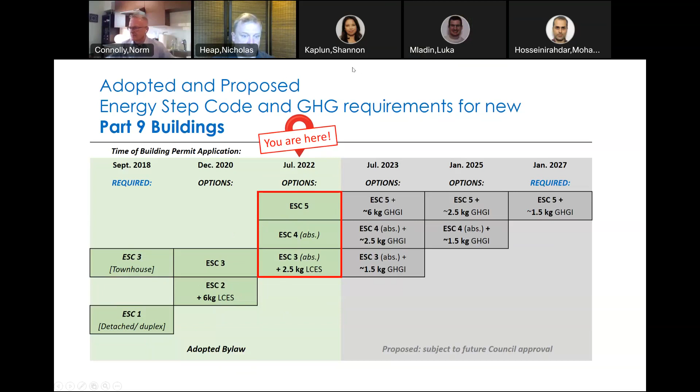So right now, I've described these as the three minimum options. Norm and I have a discussion about whether that's the correct vocabulary or not, but understand that at the moment, if you would like to build to step 3, this is the minimum you can do. If you want to build to step 4, this is the minimum you can do. If you want to build to step 5, these are the minimum options you have available. Strictly speaking, step 5 is our basic requirement. And at step 5, you have a choice of building to a TEDI metric. The numbers I've posted are not the ones in the BC Building Code, but rather the heating degree adjusted TEDI values for Richmond, because they are somewhat lower than the absolute TEDI numbers shown in the BC Building Code. So as a service to yourselves, this is what the heating degree adjusted TEDI is for Richmond.

But at step 5, you also have the option of using the percent better than reference house option. So at step 5, that's 50% better than the reference house as a way of complying with the building envelope requirement. Then we have our mechanical efficiency requirement, the MEUI. As you can see there, it's 25 kilowatt hours per square meter per year of conditioned space, or slightly higher if air conditioned space is more than 50% of your conditioned area. And then we have our air tightness target of 1 air change per hour. So that's at step 5.

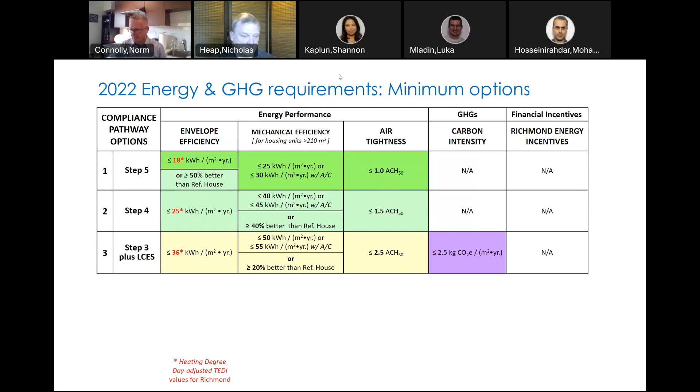Sorry. So just to make life more interesting, the province is updating the BC Building Code at the end of this year. What I've shown here is I've mapped in the changes that have been proposed by provincial staff for incorporation into the BC Building Code, and that involves some adjustments to the energy step code. So you'll see that at step 5, the percent better than reference house goes down to 40 from 50%. They've introduced a percent better than reference house for the mechanical efficiency requirement, but the province has stipulated in their draft recommendations that if you do the percent better than reference house, then you need to do both envelope efficiency and mechanical efficiency. It's certainly the case that if you choose the envelope efficiency percent better than reference house route, then you need to also do that for the mechanical efficiency, as I understand it.

Another big change is air tightness. They're including 2 other metrics, 2 other ways of developing an air tightness score that are equivalent to the air changes per hour metric. These alternative metrics produce better results when it comes to small homes, and I believe that there's a metric that works best for larger buildings as well. So the province is adopting this on the recommendation of building experts who think this will be more equitable.

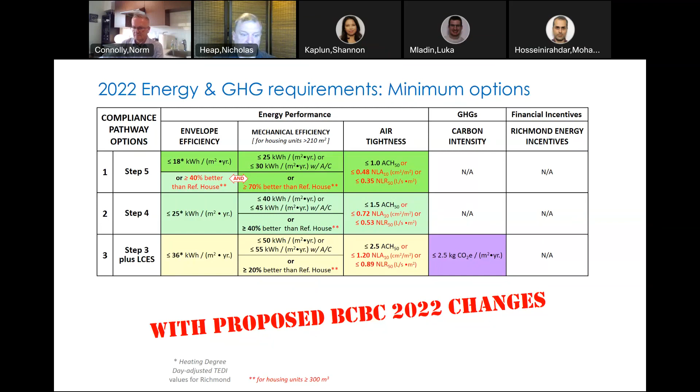So let's just take a little bit of a closer look at step 5. So again, we've got 3 options when it comes to the building envelope efficiency. We have the absolute TEDI, we have the heating degree adjusted TEDI, which is the one that we're showing on this chart. And then at step 5, you also have the option of building to percent better than reference house. For mechanical efficiency, there is at the moment no reference house target that can be hit in step code at level 5. So what you have there are the MEUI targets for conditioned space and for homes with air conditioning.

And then we have the air tightness target of 1 ACH. So there's no greenhouse gas requirements, and you can use a percent better than reference house at step 5. Next, Norm. Step 4, you do not have the option of using percent better than reference house for building envelope efficiency, although there is a percent better than reference house option when it comes to mechanical systems efficiency. So instead of doing a MEUI, you can do percent better than reference house for mechanical efficiency.

Air tightness is 1.5 air changes per hour. Again, there are no greenhouse gas requirements at step 4. At step 3, next slide, Norm. Yes. Again, you can't use the percent better than reference house option. You have a choice of options when it comes to mechanical efficiency. You can either use MEUI or the percent better than reference house option. Air tightness is 2.5 air changes per hour.

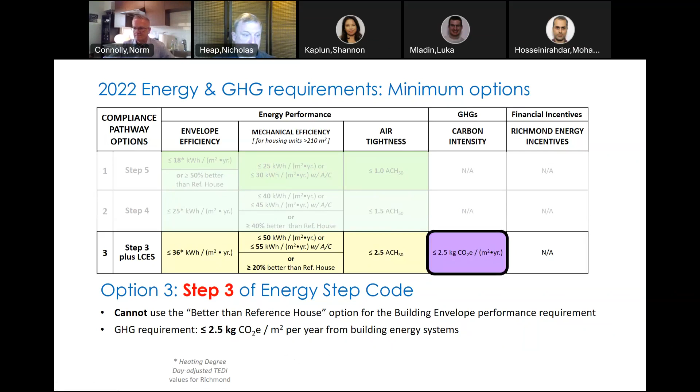Right, let's talk a little bit more about that 2.5 kilograms target, because that itself is shorthand. This set of greenhouse gas targets is taken directly from what the province is currently proposing, but you'll see it has 3 components. There's a minimum allowance that's designed with small houses in mind, because it is difficult for small homes to meet a pure intensity target. So there is a minimum allowance that covers small housing units. There is an intensity target which scales as the conditioned floor space of the housing unit increases, and then there is a maximum cap.

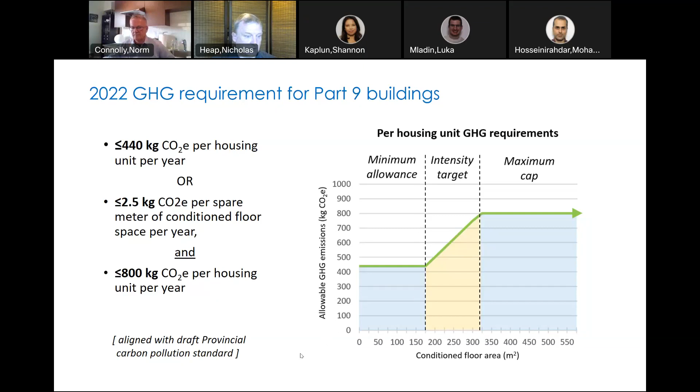So, once you get above about 320 square meters, I believe it is, for a single housing unit, the greenhouse gas target does not go up, because it is in reflection of the fact that it is easier for larger homes to meet a given greenhouse gas target. So those are the numbers put forward by the province. This is completely in line with what the province is proposing for introduction at the end of the year. So hopefully that's clear. Next slide, Norm.

It's important to say that this pertains to a housing unit. But a housing unit, as the province means it, does not apply to a secondary suite. So if we have a detached house, that is going to be 1 unit, and the greenhouse gas requirements would treat the detached house as 1 unit, even if a secondary suite was in it. If you have a duplex, then you have 2 housing units, and so this is the greenhouse gas requirement for each unit, and so the total for the building would be ×2.

If you had a 4-unit townhouse building, you would have this greenhouse gas requirement ×4 within the building as a whole. But again, if there are secondary suites in some of these townhouse units, that doesn't give you more than 4 units. It's the principal units that are being counted when it comes to this greenhouse gas requirement. And again, this is in lockstep with what the province's definitions are.

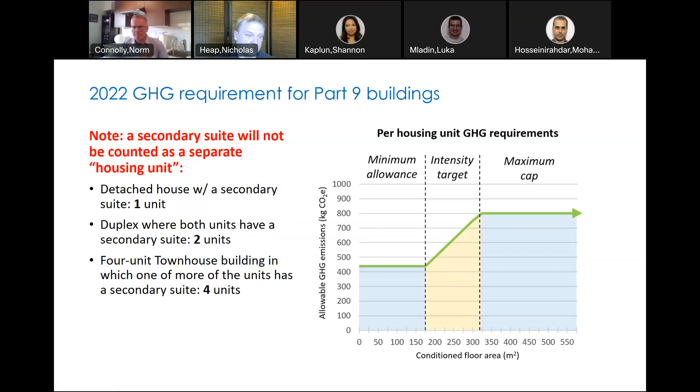So let's talk about in-stream provisions. Next slide. This is consistent with what we have done before when energy step code requirements have been increased. So if your development was subject to a development permit, and that permit was issued prior to July 1st, 2022, then you can build to the previous energy step code requirements that were in effect as of December 2020.

If you have a development permit application that was accepted before July 1st, 2022, and it is still in process, then in order to build to the previous requirements, you need to get a recommendation of approval from the development permit panel prior to July 1st, 2023. And in addition to that, you'll need to submit a complete building permit application, by which we mean all plans showing all the building details, prior to July 1st, 2023.

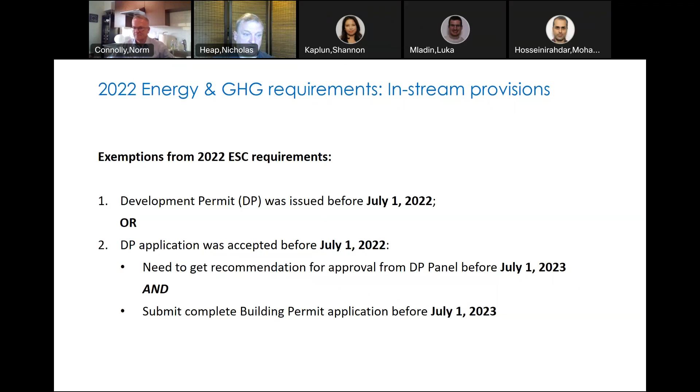So under those conditions, you can still build to the requirements that were put into place as of December 2020. If you don't meet those requirements, then the July 2022 Energy Step Code requirements apply to your development. Next slide. So now let's look at design responses to the Energy Step Code requirements. This is just a quick overview. If folks are interested, this is something that we can devote a future virtual builder breakfast to.

There was a recognition by staff that as we start going towards the highest levels of the Energy Step Code, it's not simply a matter of putting in more mechanicals or more insulation on the walls. The design of the home or building becomes an important factor in the overall efficiency.

As a summary of the design responses the city is expecting to see as we move forward with the Energy Step Code, here's a summary of the kinds of things we're expecting to see. This is of particular relevance to our form and character guidelines. If you're going through a development permit process, the city has a range of development form and character guidelines that developments are expected to meet.

This is what we expect to happen as folks are meeting both high performance energy requirements and the city's existing form and character guidelines. We would expect to see more compact massing of buildings that reduce the size of the thermal envelope relative to the volume of the building. We'd expect somewhat simpler building and roof forms that enhance thermal performance for the same reason—reducing surface area relative to volume. And we'll expect fewer complex junctions where you've got changes in plane in three directions at once.

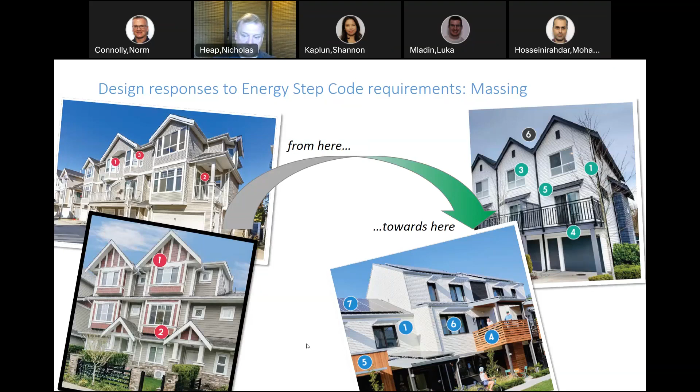Summarizing what I've said so far: we've got some buildings on the left that have been built in Richmond in the past, and these are totally code compliant. But as we move towards higher energy performance requirements, we expect a shift towards simpler volumes with less complex junctions, as I mentioned before. So we expect to see designs coming forward that look a bit more like these pictures on the right.

When it comes to balconies, they're very important in Richmond, especially in Part 3 buildings but also in townhouses. Balconies can be a major source of heat loss because the structure tends to penetrate through the building envelope, making them a major route for heat loss if you're using conventional balcony techniques. Luckily, there are a number of approaches to building balconies that reduce heat loss at the connection points, and I've got another picture to show some of those approaches.

So I've got these four diagrams below here. This is certainly a Part 3 building, although the same principle does apply to a lesser extent for Part 9 buildings. You've got a lot of thermal bridging through a conventional balcony construction, as we commonly do it here in Richmond at the moment.

But there are ways of significantly reducing that through the use of self-supported balconies, where you've got external supports for the balcony and a tie-in back to the building that can have an insulated block reducing heat transfer through the building envelope.

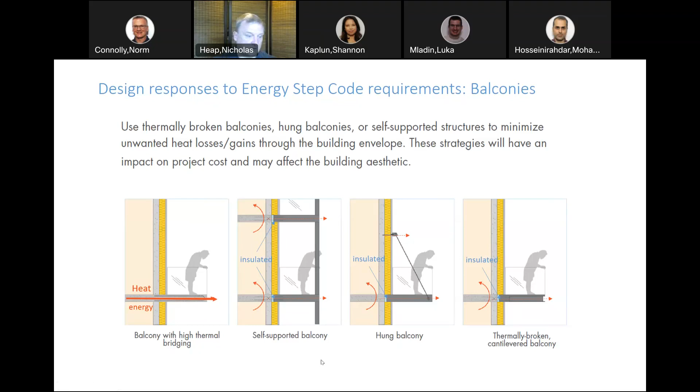We do expect to see more of this going forward as folks are building to higher energy efficiency requirements. Next, Norm.

Finally, what we expect to see is a bit of a shift away from building articulation, which is to say taking a single building and disaggregating it into its various components as a way of making the building more legible, and as a way of providing delight and visual interest. The most straightforward way of articulating a building is to change the shape of the building, to create physical little details in the shape.

But there are many, many ways of articulating a building that can involve things like texture, colors, different materials, patterning. All of these things serve to set out one part of the building relative to another, and these are all ways of achieving the building articulation that provides the visual interest and delight that we like in buildings.

Norm, next slide. Got some pictures here. So what we have in these pictures are pretty volumetrically simple buildings, but they are highly articulated.

It's very easy to distinguish one housing unit from the next, and this is sort of in a townhouse frame of reference. But what we're seeing here is a lot of use of color, of different building materials that distinguish one part of the building from the other, and some use of different textures even that result from the different materials.

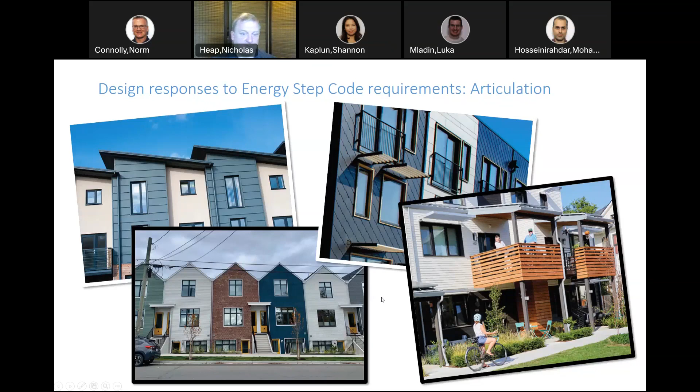That is a real quick overview of the kinds of changes that we expect to see. And here it is with stuff not grayed out. Next slide as well - when we provide the slide deck, I'll give you those two so they're easy to manage. If folks are interested in spending more time on design options, we'd be happy to do that at a future virtual builders breakfast.

But that's sort of a high level overview, and it's just to let you know that we're expecting to see a shift in the designs that proponents are coming up with as they're bringing new projects forward, as an effective response to these new higher performance requirements for energy efficiency that also keep the city's form and character guidelines in mind.

Nick, we have another question or a hand up. Okay. David Eaton would like to ask a question. David, if you want to unmute, you can ask your question. I'm not hearing David. Are you on mute, David? Sometimes it takes a second here. Okay. Maybe sometimes people put their hands up by accident. Oh, here we go. He's here. Hi, David. I think it's the lovely WebEx controls. Yes, sometimes there's a bit of a delay.

So I think we had a question from Vikas, Vikas Mesa, saying, are we thinking to stop having box windows to achieve energy efficiency? And I think the answer to that is, again, the energy step code is a performance code. So you can have as many box windows as you wish to have, so long as you meet the performance requirements of the energy step code.

What we're saying here is that in general, box windows can be a source of more energy leakage through the building envelope than other parts of the building because they have a lot of complex corners. And so it is more difficult to achieve a high level of energy performance with features like box windows. As Norm points out, the use of external insulation is one quite effective way of dealing with that.

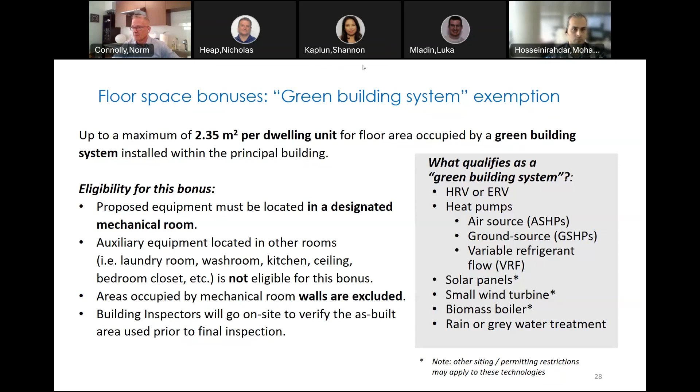And so for servicing this equipment, it's really beneficial to have something in a centralized location, and it's accessible both to the owner and to anybody servicing it. So, thanks, Norm.

So here are two examples that show how you can be eligible for additional FAR when using the green system. On the left side, there is a designated mechanical room for HRV, and the HRV has been located in there. I should emphasize that this is a designated mechanical room. It means that if you want, for example, to add your AC unit to this space, you are allowed to do that, and you are still eligible for this FAR bonus.

So be noted that you would be eligible for up to 2.35 square meters. It means that if this space is more than 2.35 square meters, for example, it is 3 square meters, you only get 2.35 square meters. Or if it is 2 square meters, you only get 2 square meters. So be careful about the up to 2.35 square meters terms.

On the right-hand side, you see that the HRV has been located in the laundry room. So this is not eligible for this additional FAR, but you are allowed to put the HRV in that space. There's no issue with that, but you are not eligible for FAR in that case. Please go to the next slide.

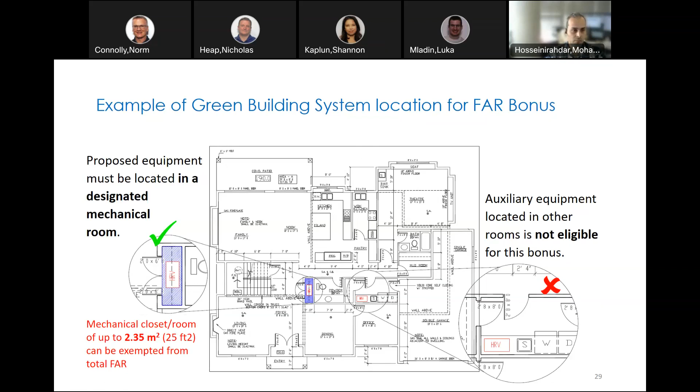Well, the additional extra floor area bonus is for those applications that have to use a thicker wall than a regular 2x6 stud wall in order to meet the envelope efficiency requirement due to the new energy step code requirement after July 1st. So as you know, for a step 4, the adjusted TEDI requirement is now tighter than before, and even a step 3 application needs to comply with adjusted TEDI for step 3, and percentage better than reference house is not allowed anymore.

So depending on the archetype, many applications need to use a thicker wall in that case. So in order to compensate the floor area occupied by the thicker wall, we give an extra floor area bonus. For a 2x6 stud wall plus 2 inches of exterior insulation, there would be 2% extra FAR on top of the FAR.

And also for a 2x8 stud wall, again, there would be 2% of the FAR added to the primary FAR, and for a 2x10 stud wall, 4% of the FAR can be added to the floor area. And we came up with these numbers by doing several measurements on different archetypes, and the average floor area occupied by a thicker wall came up with these numbers.

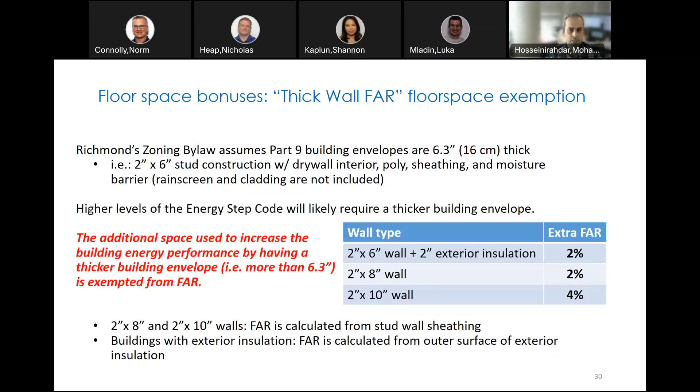You can visualize this. Here's an example of a 2x6 stud wall plus 2 inches of exterior insulation. So first of all, floor area is measured from the exterior surface of the exterior insulation. So in this case, the FAR is calculated from the exterior insulation, and it comes up with 146.5 square meters. So 2% of this value would be 2.93 square meters, and this can be added to the floor area for this application.

So this should be repeated for the second floor for a complete application. Here is just an example of the ground floor. For a complete application, this should be repeated for the second floor as well. And that extra floor area can be added to the total FAR.

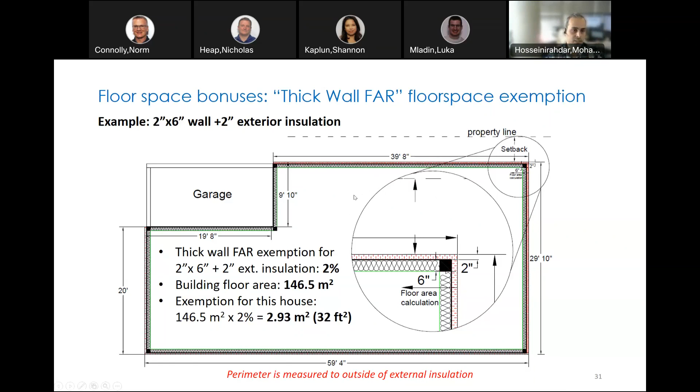In the next slide, here is an example of the 2x8 wall. So as I said, the measurement here is taken from the exterior wall sheathing. And in this example, based on the exterior dimension, the floor area came up with 143.7 square meters. 2% of this FAR would be 2.87 square meters, and this would be added to the floor area as a bonus.

So as you see, you have to use a thicker wall for increasing your level of building envelope and insulation. That means that some part of your floor area is occupied by the thicker wall, but we give this bonus and compensation so you don't lose floor area when you use a better level of wall insulation.

And just to add, these dimensions and calculations that Mohammed's showing in these details were just an example to show how we arrived at the 2%. You will not have to do these calculations yourself. If you have a 2x8 wall or a 2x6 wall with 2 inches of exterior insulation, you just take the allowable density for the lot that you have, and you add 2% to that, and that's how much square footage you can build on the property.

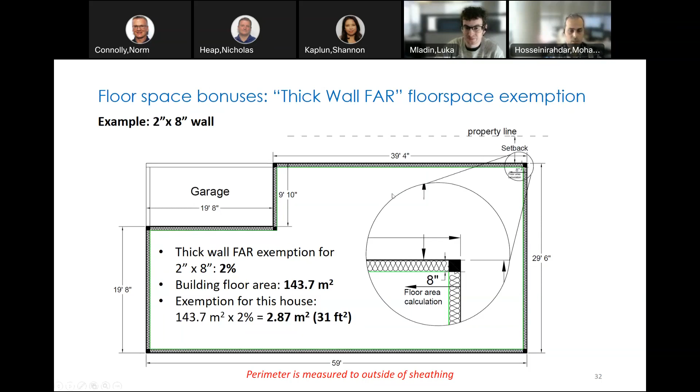So yes, next slide. So there are other FAR bonuses for applications that would like to apply for Step 5 and passive house. For a Step 5 application that meets the requirements for energy efficiency, mechanical energy efficiency, envelope efficiency, and airtightness score, as noted in this table, there would be a 5% additional FAR bonus for these houses, 100% of the building permit fee would be rebated, and also 5 square meters of floor area would be given for using a green system for a Step 5 application.

I need to emphasize that Step 5 applications that apply for incentives need to comply with the adjusted TEDI as mentioned here, 18 kilowatt hours per square meter per year. And you're not able to use percentage better for envelope efficiency if you want to apply for Step 5 incentives.

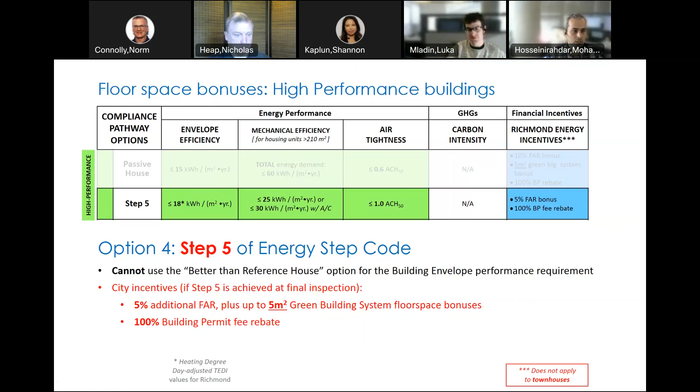Next slide, please. No. Sorry, I've grayed out the wrong part there. My apologies. Can we just speak to it anyways? Yeah, let's speak to it anyway. So I've made it hard for folks to see it, because I just screwed up there.

But if you choose to build a passive house, passive house is an international standard. These requirements are not created by the provincial government, certainly not by us: an envelope efficiency of 15 kilowatt hours per square meter of conditioned floor space per year, a total energy demand for the building of less than 60 kilowatt hours per square meter of conditioned floor space per year, and an airtightness of 0.6 air changes per hour. That is the passive house standard.

If you build successfully to this standard, that is a 10% floor area ratio bonus. The green building system bonus increases from 2.35 meters to 5 meters. And again, there is a 100% rebate on the building permit fees.

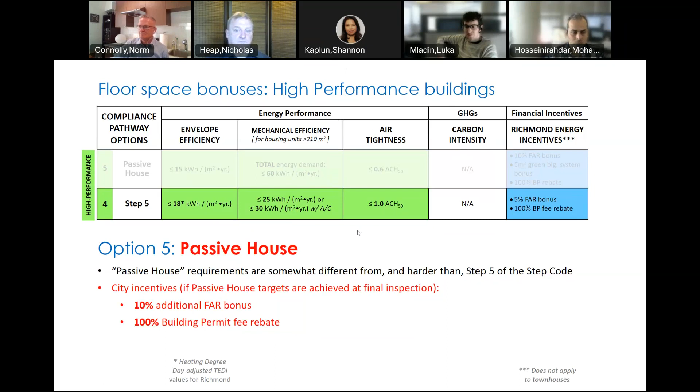And in those cases, the city is providing additional high performance energy incentives. But the other bonuses that we were just discussing, the green energy system and the thick wall exclusion, apply to all houses at any of the levels that we're looking at here. So if you have a Step 3 house with a thick wall, then you can get the thick wall exclusion. If you have a Step 3 house with a mechanical room or green building energy systems, again, you can take advantage of that FAR exemption as well.

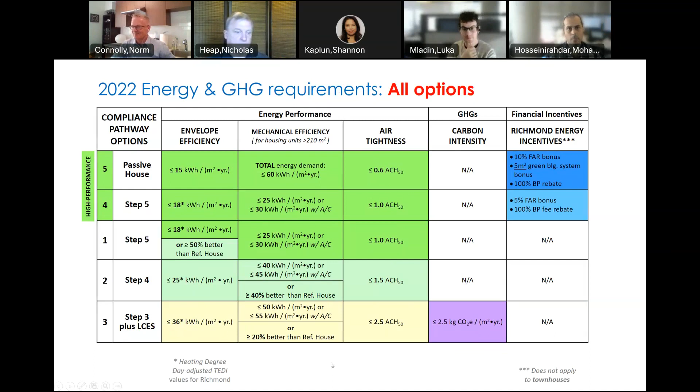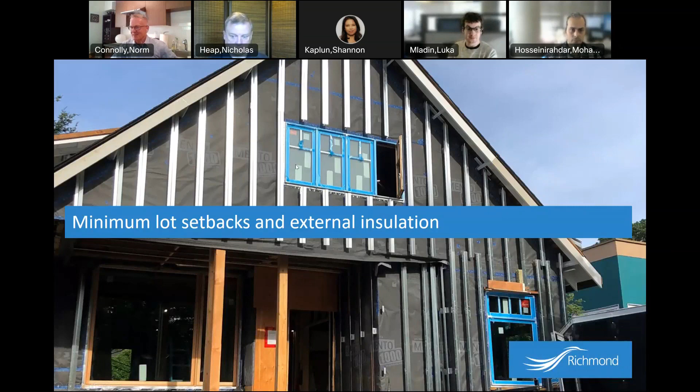And a topic of conversation already in terms of that, and a deep dive into this a little further.

Luka, were you covering this? I don't think I was, but I can.

Okay. That's fine. So yeah, for buildings with exterior insulation, we're going to be measuring your setbacks from the property line to the outside of those exterior insulations. For buildings with external insulation, the distance from the property line to the building foundation will be larger than the minimum required setback. So there'll be a difference between where your insulation is, that's your setback, but then your foundation will be set a little bit further in. So those shifting of the foundations by, let's say, 2 inches, if you had a 2-inch exterior insulation, you have to adjust that for your building and for your square footage calculations.

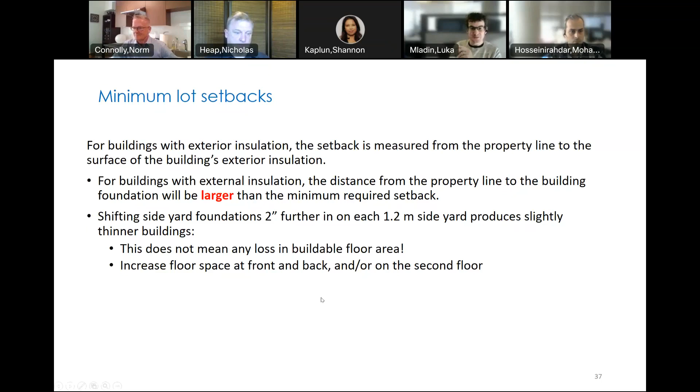Next slide, please. Yeah, so as part of your application, you're going to include a site plan, which you already do as a designer, but you just have to be aware that when you're drawing your site plan and your footprint of your home, you're drawing to the outside of your exterior insulation. The only additional thing we'll ask for is for you to provide a foundation plan with the lot line shown with the adjusted setbacks for the foundation itself.

This is important for forms inspections so that inspectors on site know exactly where your forms need to be, and that we can also, as plan reviewers, check it against your structural drawings so that those dimensions on the structural foundation plans match your architectural drawings of the foundation plan. Next slide, please.

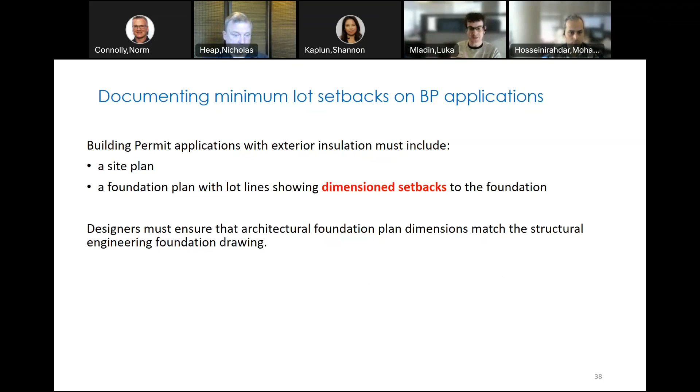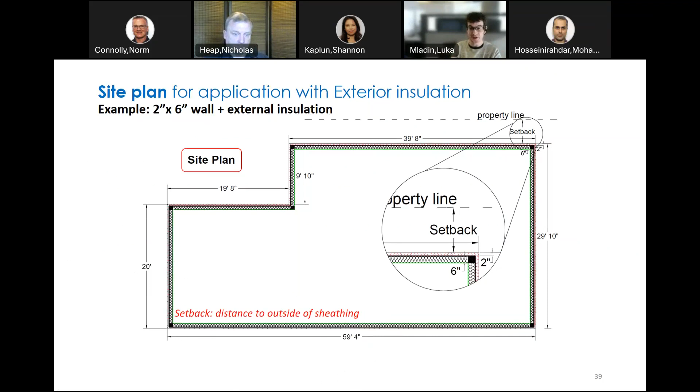And then also, we're hoping that this will help you coordinate with your structural engineers to make sure that all of your dimensions on this plan match their dimensions on their foundation plans. But again, just to clarify, this additional foundation plan will only be asked for when using external insulation. If you're using a 2x8 wall or a 2x10 wall, we will not ask for this additional drawing. And that's it for me.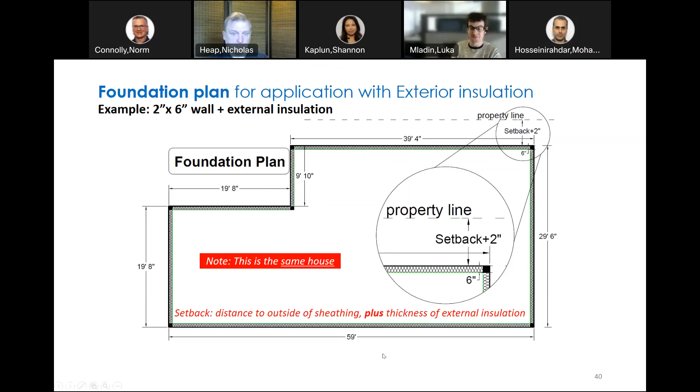Thanks, Luka and Mohammed, on that deep dive. Any further questions on this? There are some questions. I think we've already covered the requirements and regulations of installing a heat pump, have we not? No side yard? Yeah, that one we did, yes. Does CHBA net zero labeled homes get any incentives? Not from the city. Okay.

What efforts have been made in Richmond to be consistent with other municipalities? Go ahead, Nick. Yeah, I think the cities are in conversation with each other. Certainly, with the new BC 2022 coming into effect, which is going to require step 3 as a minimum, there's simply less options for municipalities to choose from. We're certainly seeing many municipalities go to step 5 as a default option, with step down options for folks that put in low carbon energy systems.

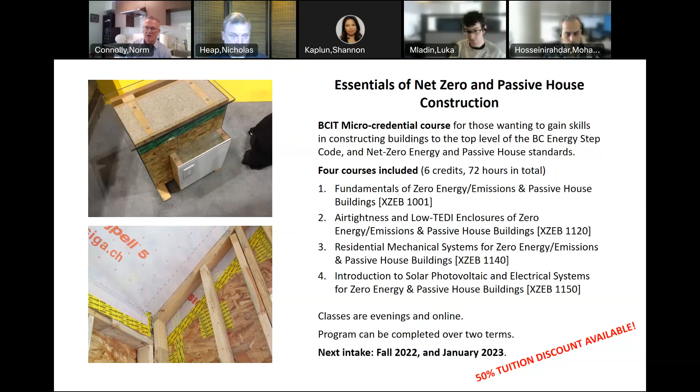Included with this, if you have a preference for hands-on and in-person instruction, you can get an additional 2 credits for a 24-hour in total course on air tightness and low TEDI enclosures. This is a hands-on lab in the high performance construction lab at BCIT. And if you enroll in this, you don't have to take the online equivalent course, but you get a lot more in-person, hands-on, in-lab time.

If that's something to think about, you can also look at this. This particular course is offered 3 times annually, both in the fall this year and into January, and of course the spring. Once again, a 50% tuition discount is available.

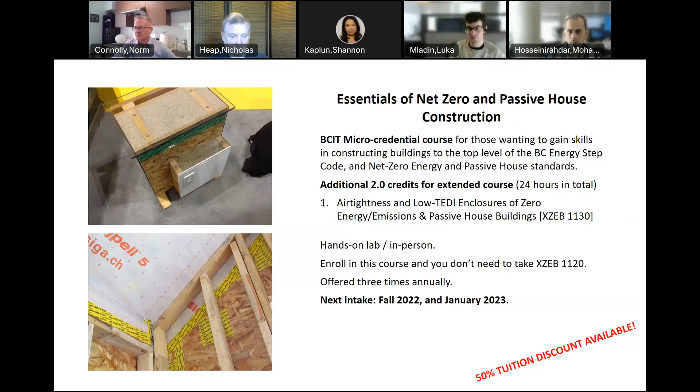We're also opening up the discount package for those that have a construction consultancy or operation where they're looking to improve or bolster their skills in supervising and administering on-site construction of high performance buildings at the net zero and passive house level.

This is once again a micro-credential course consisting of a number of components to be completed. So if you're coordinating or supervising smaller teams and sub-trades on Part 9 projects or even larger, more complex wood frame projects, this course might be for you.

It gets you into the details on on-site characteristics of managing compliance and achieving the performance requirements of STEP code and passive house standards, and also preparing for the upcoming changes to the National Building Code. So that program is offered as part of this package.

Just as a mention, BC Housing Builder Licensing, October 2022, has new requirements for energy step code training, and obviously references these courses as one of the ways to achieve it. BCIT's courses are equivalent to all 8 of the mandatory energy step code CPD training modules needed for builder licensing. So it's something to consider on that pathway to maintaining your CPD as a builder - taking these modules, especially the new ones, will qualify.

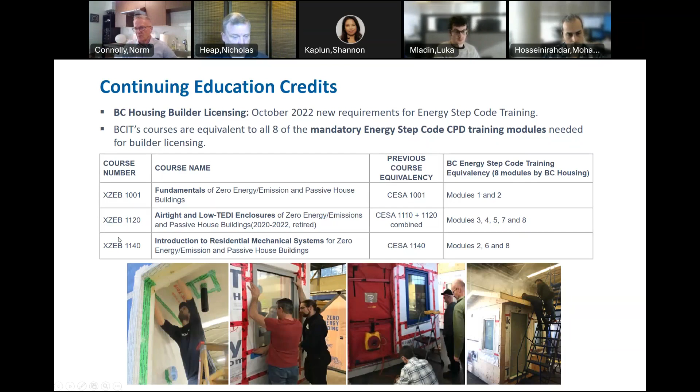So these ones - 1001, 1120, and 1140 - are the courses that are particular for the energy step code CPD training modules in terms of the equivalency. The columns here just reference last year's previous course equivalencies for comparison, but they've been reformatted and renumbered for this year and next year.

So how it works is basically the courses are online or in person or a combination of both. These are eligible for that 50% tuition discount from the City of Richmond.

So if you've got questions about the courses or micro-credentials, you can contact me directly by email or Mary McWilliam at BCIT - I'll repeat this on the next slide. Mary McWilliam is one of the heads of the arrangements in terms of the training programs and setting up the curriculum, and very, very helpful and informative. If you have any questions, you can go right direct.

So here's how to participate. You can contact BCIT directly and mention this program and that you have a project that's in Richmond or will be in Richmond, and just have that discussion so it can be confirmed you're eligible for the tuition subsidy.

Once again, Mary McWilliams' contact is there. After that, BCIT will register you for the selected courses and confirm your portion of the tuition fees owing, which is 50%. Then you make that tuition payment for the reduced amount. So pretty much 3 easy steps.

If you're interested, please take advantage of that. We have a certain amount of funding available, but it's still fairly robust to cover the fall and into next year. So have a look at their curriculum, give it a think, and if you're looking to really bolster your training in meeting the top level of the step code and Passive House, this is definitely one way to do it.